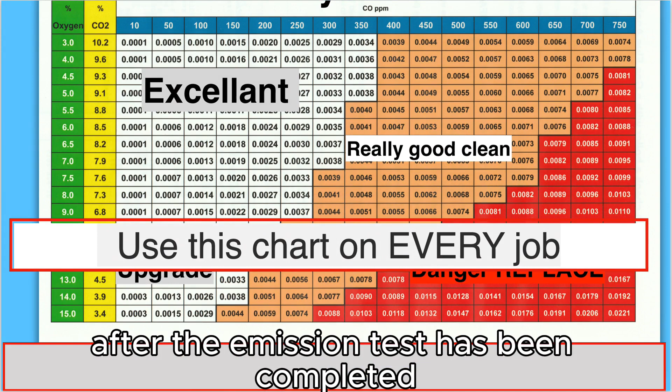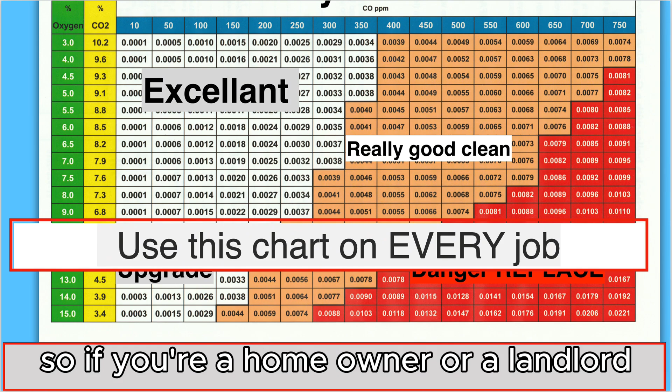Every gas boiler has to have a check for emissions and safety once a year, done by a Gas Safe engineer. And this is compulsory if your boiler is under guarantee. My chart will show you whether it's good and efficient or bad and inefficient, and the engineer will then make a decision whether to give it a service in the orange sector, or in the red sector, shut it down. After the emission test has been completed, the engineer must give you a printed copy or email it to you on the spot. This is a requirement, so if you're a homeowner or a landlord, insist this is done.

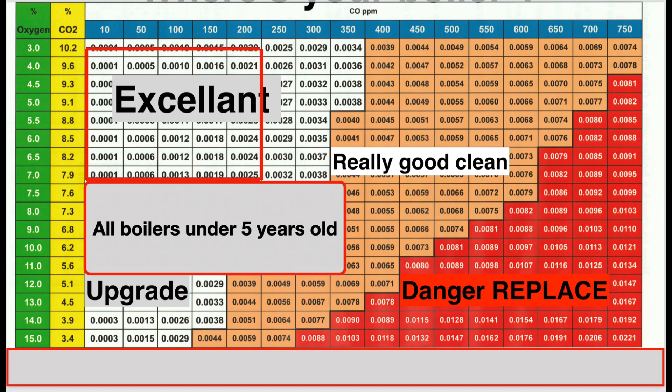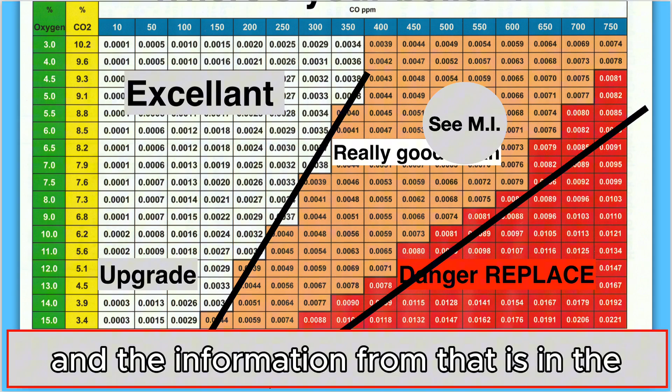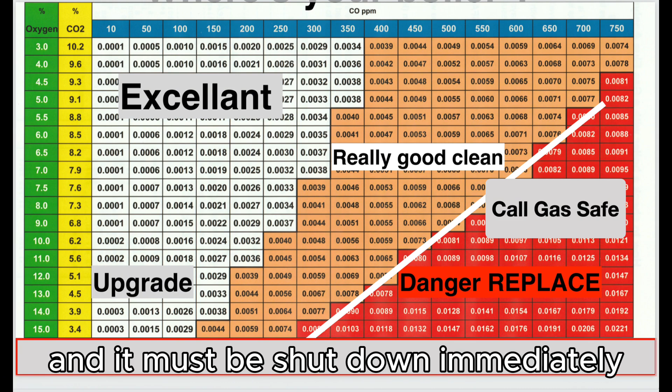If the boiler is under guarantee and under 5 years old, it should be in this excellent section, the top left-hand corner in white. The orange section is simply a guide that the boiler may need some serious servicing, and the information for that is in the manufacturer's instructions, or there's a phone call to the factory for guidance. If the emissions are in the red sector, then that means that the boiler is now dangerous to either life or property, and it must be shut down immediately. A phone call to Gas Safe for guidance is required.

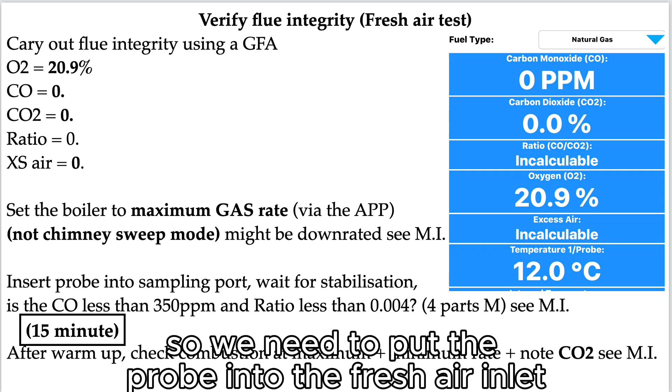The first part of the emission test is to check that the flue is sound. So we need to put the probe into the fresh air inlet and make sure that we've got zeros all the way down, apart from air, which should be around 20.9%.

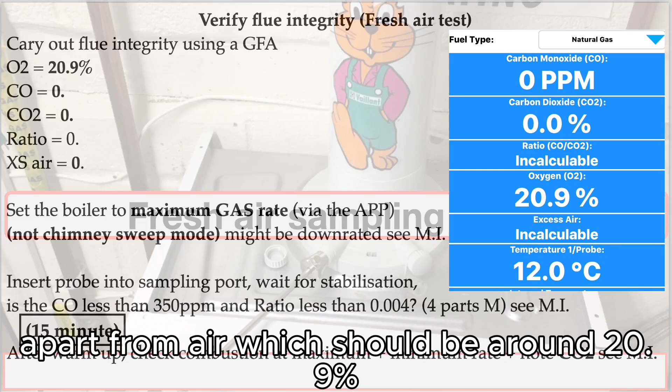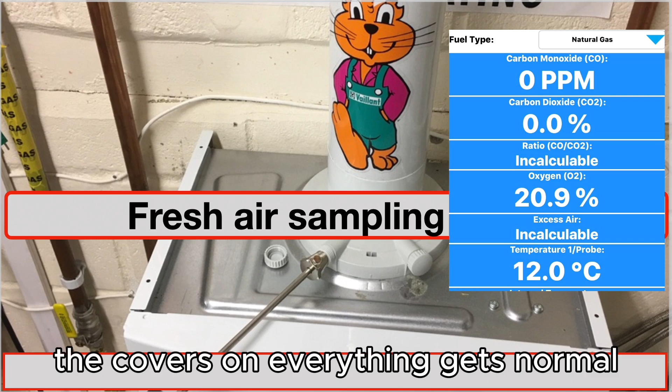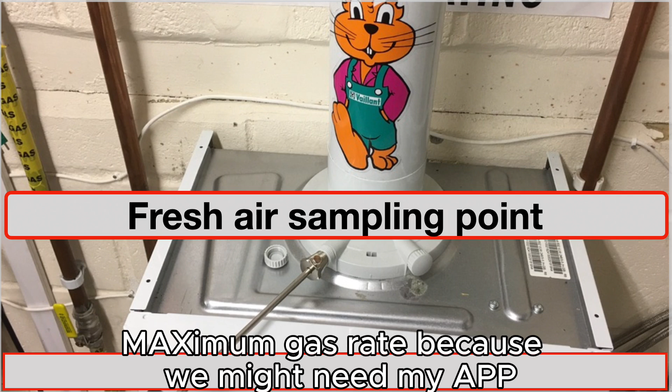Before we can do any testing, make sure that the boiler has not been touched. The cover's on, everything is normal, and you've set the boiler to maximum burner rate, because it might have been downrated or something could be wrong. So make sure, look in the book, maximum gas rate, because we might need my app gas rate calculator to check it. Then put the probe into fresh air, through the window or outside, until the reading on the analyzer stabilizes at around 20.9%. Then save it.

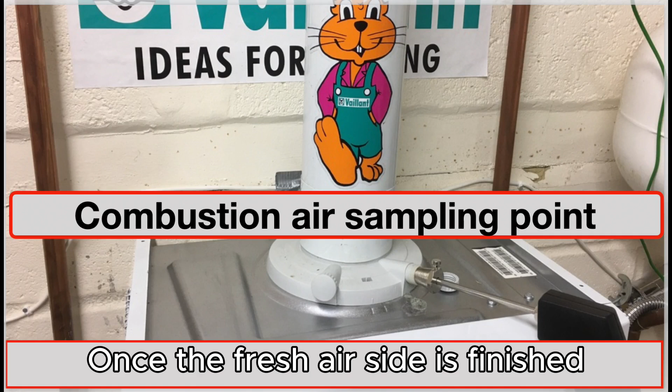Once the fresh air side is finished, put the cap back on and then put it into the combustion air sampling point. When those figures stabilize, save and print both copies, the fresh air test and the combustion air test. You must print that off, give it to the end user or email it to them. If you're a homeowner, then ask for that to be done there and then, so they can either text you or preferably email you those figures. They are crucial so we can compare each year how the boiler is progressing and the efficiency is maintained.

Before you do any emission tests, make sure that you've got the 3 apps downloaded so you can make sure that everything is as it should be. The gas rate calculator, heat loss calculator, and the gas pipe sizing calculator.

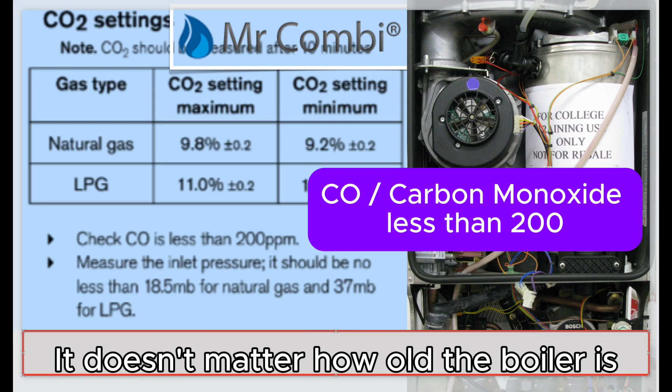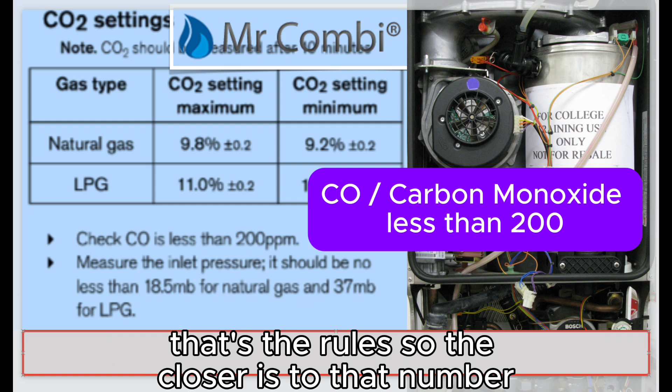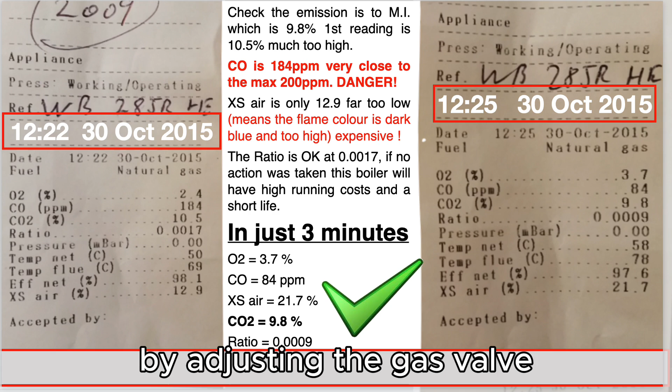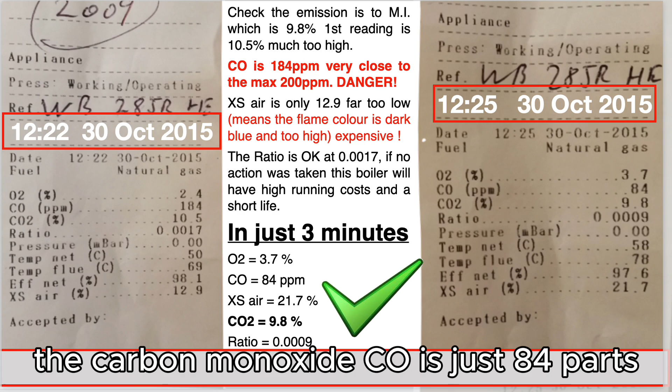It doesn't matter how old the boiler is, the most important figure that we're looking for is CO, carbon monoxide. It must be lower than 200. That's the rules. So the closer it is to that number, phone the factory for guidance. This is a perfect example of a boiler that's just 6 years of age from Worcester Bosch, top company, and as we can see the CO is 184 parts, obviously dangerously too high. And just 3 minutes later, by adjusting the gas valve, which the manufacturer told me to do, I brought it back into line, and now you can see the picture on the right. The carbon monoxide, CO, is just 84 parts. That's a result. Make sure that's what it is when you leave.